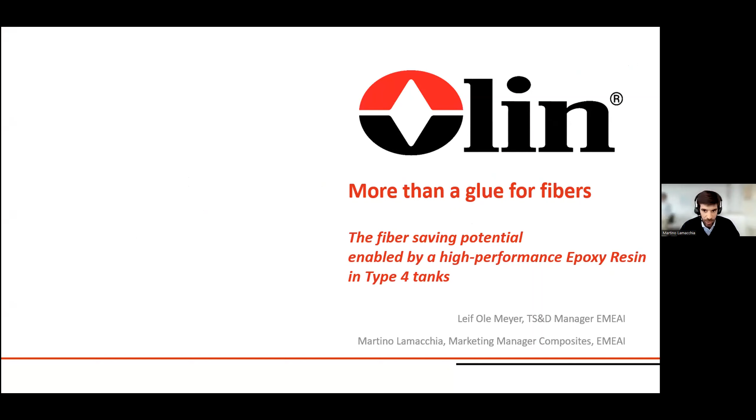Next slide, thanks. Before deep diving into the topic, allow me to spend really 5 minutes introducing Olin Epoxy, for those of you who didn't know it, or Olin actually.

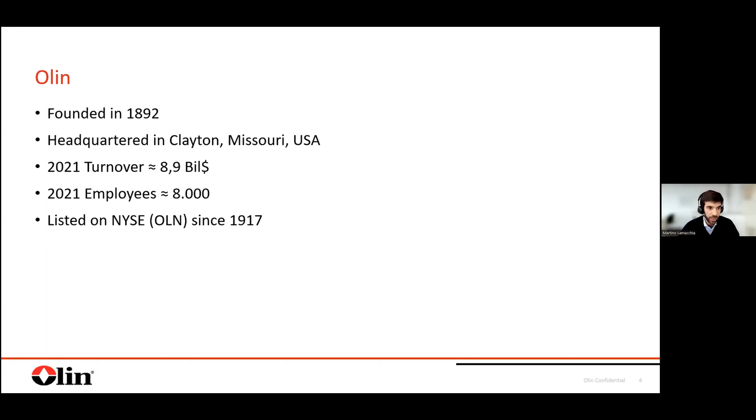Now, I will definitely not bore you with the full history of Olin, but I'd like to mention 3 facts about our history relevant to today's discussion. First of all, in 1892, 2 companies were born in the US: Olin Industries, an ammunition producer, and the Mathieson Chemical Company, the first company in the US to make chlorine out of salt electrolysis. So chlorine has really been in the soul of these companies for years.

Then in the '50s, these 2 companies merged together, originating a diversified group active on chemicals and ammunition. And we are still today that kind of company.

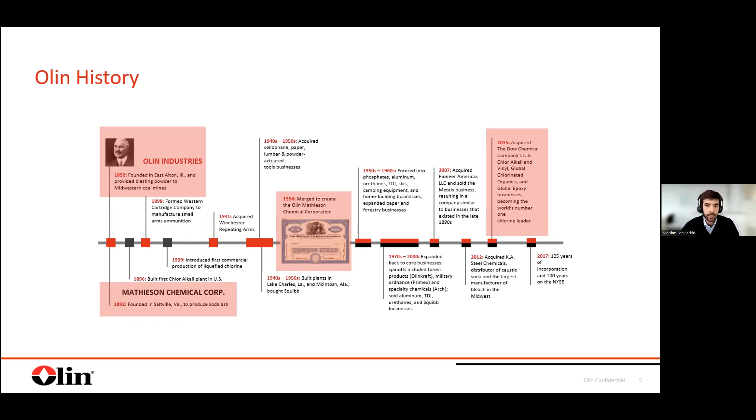The third fact I want to mention: in 2015, a transformative milestone for Olin, when it acquired from the Dow Chemical Company the US chloralkali business, the global chlorinated organics business, and importantly for our talk today, the global epoxy business. Thanks to this move, Olin became the #1 global producer of chloralkali products and the #1 global producer of epoxy materials, inheriting this position from Dow Chemical and bringing it to the next level.

So Olin today is organized into 3 businesses: Olin Chloralkali Products and Vinyls, world leader in chloralkali; Olin Epoxy, world leader in epoxy resins; and Winchester, our ammunition business, world leader in small to medium caliber ammunitions.

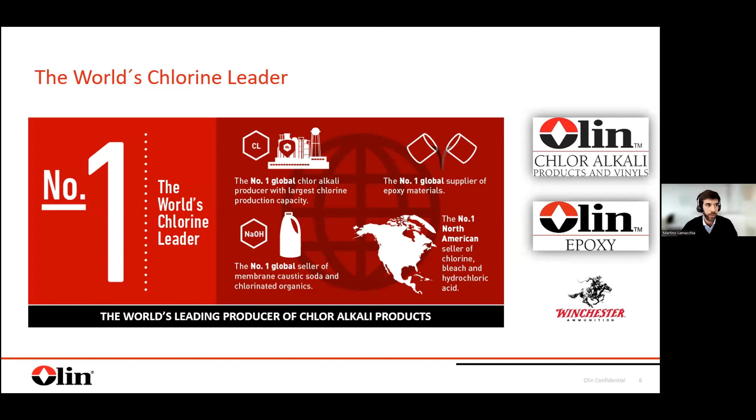Now, if you want to remember something about Olin Epoxy, the next few slides are key. First of all, what do we do? We leverage epoxy properties like lightweight strength, corrosion protection, electrical insulation, and chemical resistance to approach markets where these properties are valuable, like composites, coatings, electronics, and civil engineering. So that's what we do, in 30 seconds.

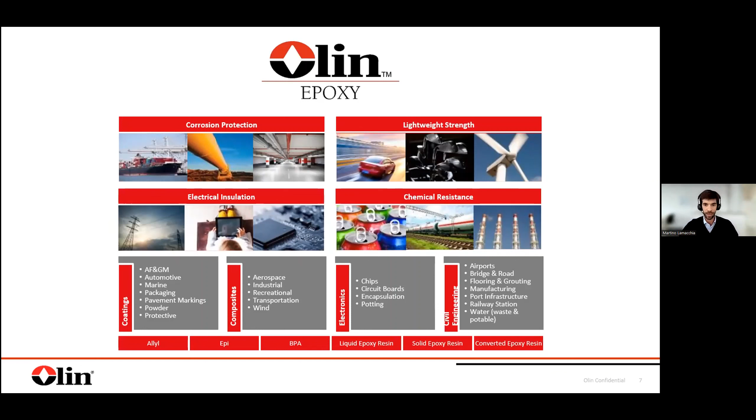Now let me focus your attention on this slide, which I think really explains the key differentiating aspect of Olin. I don't know how familiar you are with epoxy chemistry, but from a super high level, to make epoxy resin you need 2 things: epichlorohydrin and bisphenol A.

Now, most epoxy resin producers run a non-back-integrated model, sourcing epichlorohydrin and bisphenol A on the market. This model might have some advantages, maybe leaner assets, but on the other hand it presents question marks in terms of reliability of supply. How do you reliably find the epichlorohydrin needed to make liquid epoxy resin, for example? Epichlorohydrin is a structurally short material, causing big headaches to those who have to source it externally, and also raising question marks about how scalable a non-integrated epoxy supplier can be.

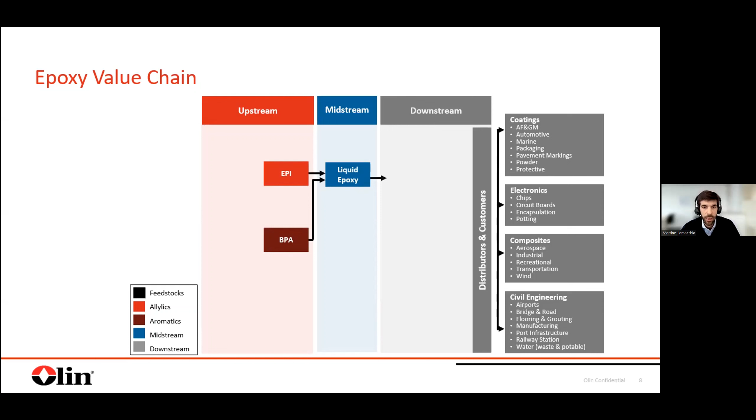Epoxy resins are linked to many applications that will require growing amounts of epoxy resin going forward, like wind power and composites. So a non-integrated model poses question marks in terms of how to find the epichlorohydrin needed to supply growing amounts of epoxy resins into the growing epoxy industry.

Now, as you can see from the slide, Olin's model is completely different. It's a deeply back-integrated business. And here you see why Olin, a chlorine leader, acquired from Dow a global epoxy business, a huge consumer of chlorine.

This very deeply back-integrated model sees Olin starting from digging our own brine mines to make our chlorine, then converting it to allyl chloride, to epichlorohydrin, and then to our resins, which are then converted into many other systems and products.

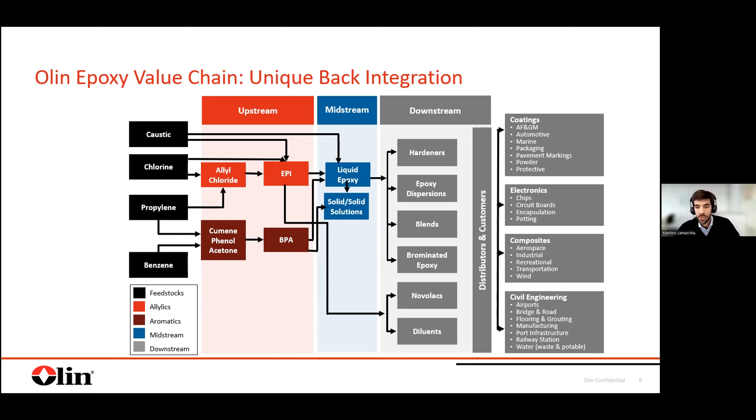In the next slides, you will see our composite systems that are an example of what we do and what we use our structure for at the end. In composites, we make systems for several technologies, from pultrusion to infusion to hand layup, HPRTM, prepreg, and obviously filament winding. That is the topic of today.

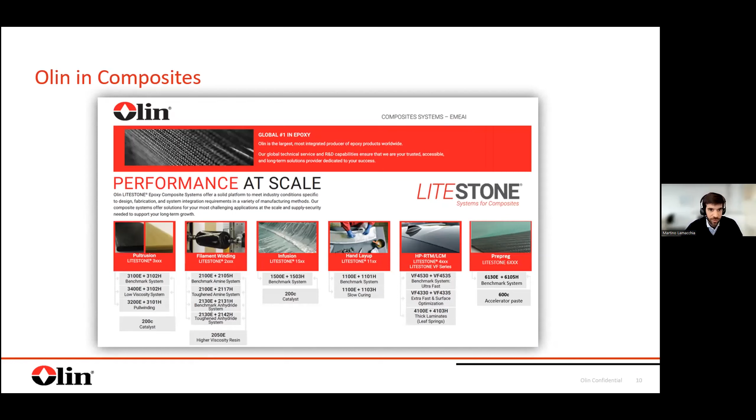When talking about our composite business, we like speaking about performance at scale. We like that because we think our deep back integration is putting us in the right position to supply in the long term the big growing volumes that some of these high growth composite applications will call for. A very good example of these growing applications are composite pressure vessels.

We get now near to our topic. Composite pressure vessels are linked to some of the mega trends shaping our industry. Think, for example, of climate change, decarbonization, the big need to reduce emissions from transportation. 12% of greenhouse gas emissions come from road transportation. So we are seeing a big shift towards alternative fuels. One of these alternative fuels is...

electricity. This generates a big market for battery electric vehicles, but also generates a big market for fuel cell electric vehicles, also known as hydrogen vehicles. Forecasts show that by 2030, we're going to see between 2 million and 2.5 million fuel cell electric vehicles on the road, mostly medium to heavy duty vehicles, so trucks and commercial vehicles.

These vehicles, being electric, will need to drive far to be attractive. And to drive far, they will need to carry on board a lot of hydrogen. To carry on board a lot of hydrogen, this hydrogen will need to be stored at very high pressures. And that's where composite tanks come into the picture.

This will also generate demand for, let's call it, hydrogen infrastructure - how to bring hydrogen to the refilling station and how to store it there. Again, composite pressure vessels are going to be part of the game.

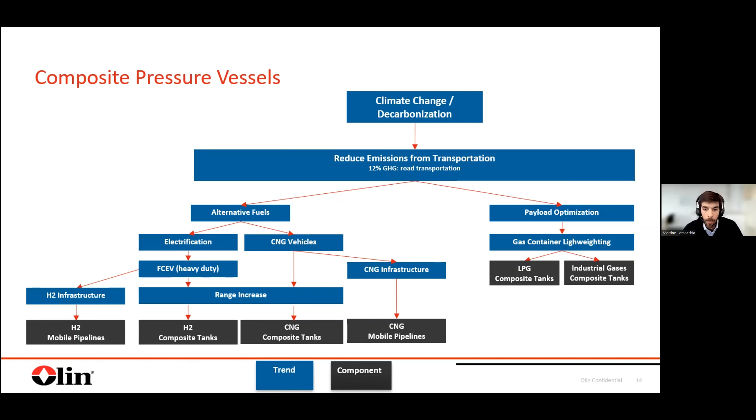Now let's come to the topic of our presentation in the next slide, which is: what is the role of the matrix in composite pressure vessels? This is actually a pretty wide, pretty general question. A good next question to narrow it a bit could be: what matters in pressure vessels? What are the requirements, and what role can the matrix play within these requirements?

In the next slide, we have tried to narrow down the discussion to one specific application that we think is a very good example of the epoxy's role in this whole thing. So we are mentioning hydrogen pressure vessels in this case, and we use as an example this table that comes from the norm EC 406, which regulates type approval of composite vessels for hydrogen vehicles.

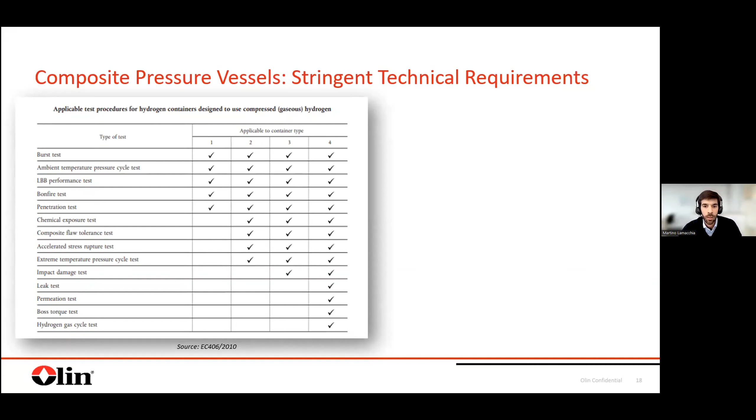The table here that we are showing lists the tests that a hydrogen vehicle needs to undergo in order to gain type approval. Now, in the next slide, you will see, in our view, that the matrix is key in at least 50% of these tests. So we want to mention two examples of that.

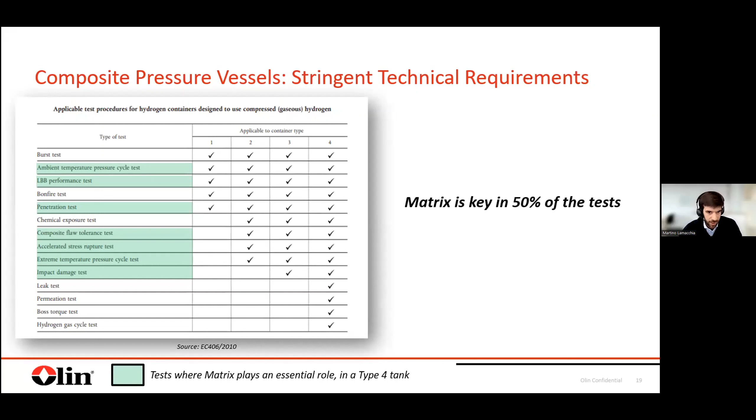So in the next slide, we have listed two examples we want to show. At the end, when you look at what are the CTQs, we don't have time to go deeply through all these tests. But if you read the requirements, you'll understand that resin CTQs that really make a difference are fatigue resistance and fracture toughness, which can play a vital role in pass-fail of these tests. We want to show you two examples of this.

The first example is the temperature cycle test. Here you see what happens to a clear cast of epoxy resin where a solid object has been put in to facilitate the generation of cracking. What happens to this clear cast when it's cycled between -20 and 80 degrees for 10 times? You see the difference between a toughened epoxy resin and a non-toughened epoxy resin. I think the pictures are self-explanatory.

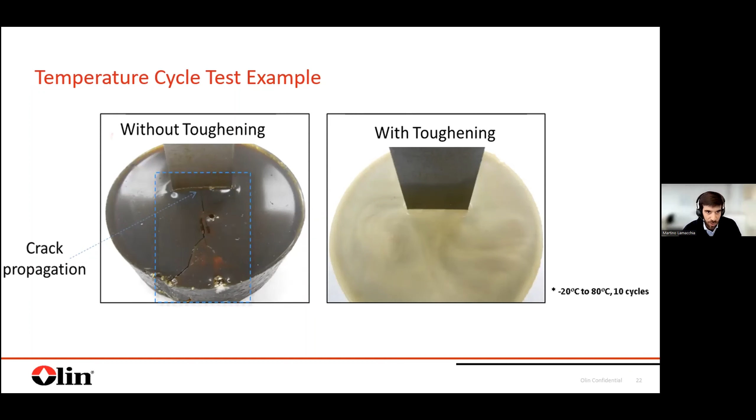So you see how the selection of the proper matrix can make a difference, for example, in a temperature cycle test. Let's go to the second example, which is the impact test. When generating a specified impact under specified conditions, needed to gain type approval, you clearly see a correlation between the impact energy and the burst pressure of the tank. A good question could be, why is that happening?

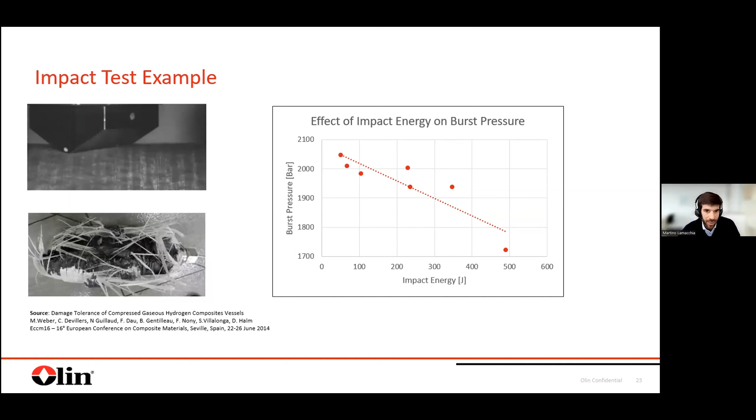If you look at the pictures in the next slide, you will see that a reason for this correlation is the delaminations and microcracking generated during an impact. Delamination and microcracking are deeply dependent on the matrix, the type of matrix you are choosing.

The key high-level concept we would like to transmit here is: not every matrix is the same, not every epoxy is the same. Different grades for different applications and requirements.

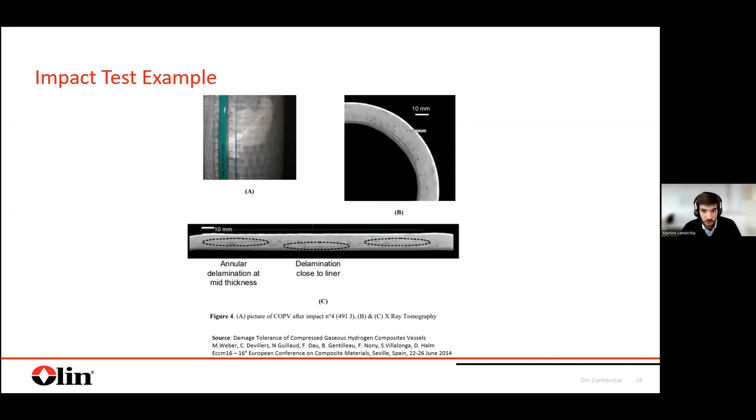Again, this emphasizes how the choice of the epoxy matrix can make a difference in some of the key tests needed to gain type approval of a tank.

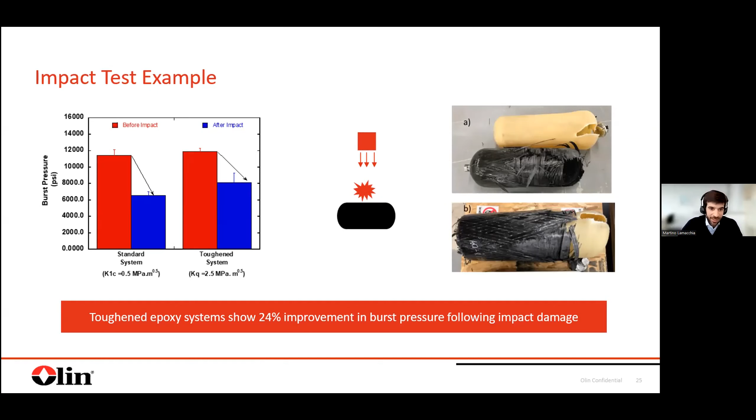So in the next slide, we are showing a sort of challenge to you. The challenge is: if thanks to an enhanced resin you can gain some extra performance, as you saw in the previous slide, why not think about optimizing the fiber content of that tank, bringing the performance back to the previous level while having saved some costly carbon fibers? This is a bit the challenge we want to pose with this presentation.

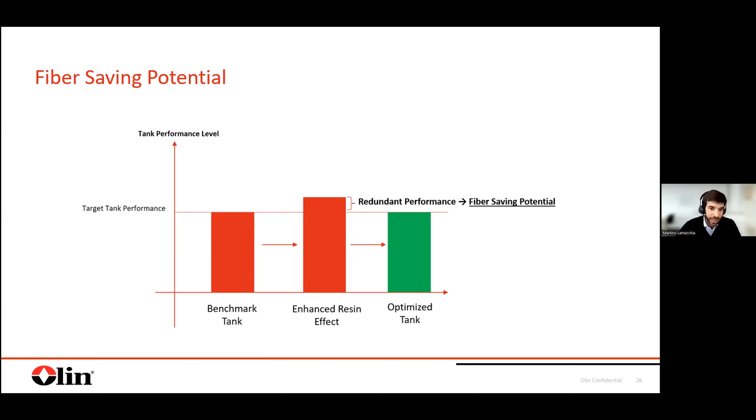In the next slide, I'm trying to wrap up this first section, just saying: when designing a tank, when trying to optimize the fiber content of a tank, don't think of the epoxy resin, the matrix, as just a glue for the fibers. And here we come to our title: it's something more. The epoxy matrix, and the right choice of it, can play a vital role in passing or failing at least 50% of the tests needed in hydrogen homologation testing.

So we are here to support, and are very happy to support, anyone who needs help selecting the right system for the right application. However, this is not the end of the story, because epoxy is not only key to the mechanical performance of the composite in our tank, it's also one of the most defining elements of the processing of this tank in a wet winding process. In the second part of the presentation, we want to drive you through this other important aspect and the role of the matrix in processing.

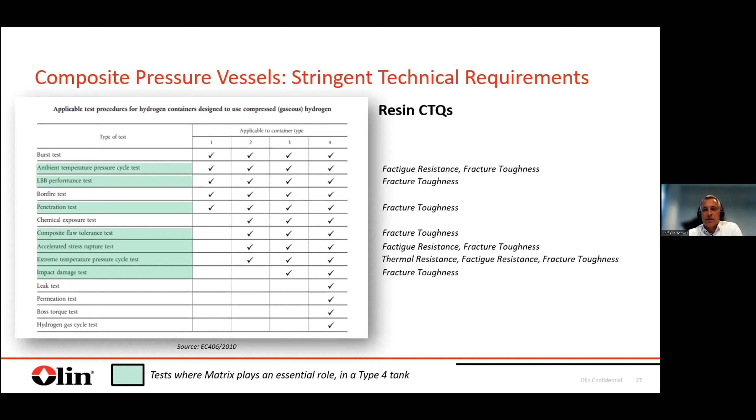In the end, for us as a resin supplier, the certification requirements of a tank do not represent the full critical-to-quality parameters that we typically get from our customers, because first of all, a tank needs to be manufactured, and the manufacturing process is also driving a lot of these challenging requirements. So toughening is important, but it's not everything, because some typical toughening agents used for thermosets have impacts on other parameters as well.

Usually you are targeting to increase the fracture toughness of a system to achieve higher damage tolerance. But what could happen is, for example, a viscosity increase from fillers or rubbers. There could be changes in reactivity if you're using inorganic fillers with particular surface chemistries. It can change tensile properties if soft particles or soft phases are used, impacting overall composite properties. And last but not least, plasticizers, which can also achieve toughening, would impact the glass transition temperature, and finally the service temperature of the tank. So in the end, we need to consider all these different parameters.

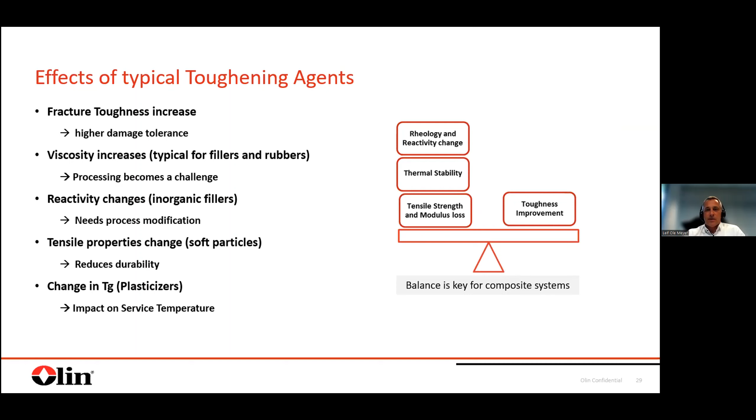As shown on the right side, we need to find the right balance between performance-driven requirements and manufacturing-driven requirements. To dive into this topic, we've prepared a second case study: the resin requirements for the classical wet winding process. Here we'll focus a lot on the manufacturing process. We've decided to focus on the most established but also simplest process, the very classical wet winding process.

If we look at this process, we start with a creel holding the dry fibers on either bobbins or rolls. There's some fiber guiding, and then the first point where resin comes into play is the fiber impregnation, which can take place in a resin bath - in the simplest form, just an open bath, a reservoir filled with liquid resin. Then we handle the impregnated rovings and wind them, typically around a liner material made of metal or polymer. Today we see polymers dominating the picture, particularly for gas storage.

Once the winding step is completed, the tanks, still with liquid matrix, are transferred into a two-step oven process. In the first step, the target is usually gelation or initial cure, and in the second step, the so-called post-curing, where the full degree of cure, final Tg, and final mechanical properties are achieved. Overall, we see 4 to 5 or even 6 process steps, depending on how deep you dive into the different processes, and it looks too complex to directly guess the processing or resin requirements based on this.

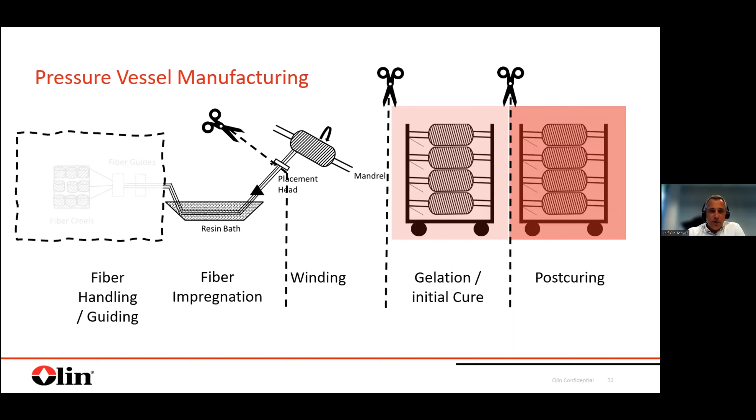So let's start running through the process, beginning with fiber impregnation. The purpose, or key process requirement, of fiber impregnation is typically to provide very good wetting of the fibers, to cover all fiber surfaces with epoxy resin, and to have no air entrapments or other bubbles, which would be a deviation from the desired condition.

And last but not least, we expect this also to run over a relatively long time in a stable process without a lot of need for corrections. Based on this, the key material requirements for the fiber impregnation step: first and most important is the viscosity to achieve excellent wetting and a good high line speed for productivity. Basically, the viscosity needs to be low or even very low. It's really for the wetting. In particular for carbon fibers, the viscosity should be as low as possible.

Looking at the pot life, in particular for the classical open bath, it should be as long as possible. Or let's put it a little differently, as long as needed. If you have a process able to run with a very small bath volume, you may accept some compromises on pot life, but in general, what we still mostly see is relatively big resin bath volumes. So you need this entire volume of material not to react, to keep the pot life and workability over a very long time. So reactivity should be low or even latent. And of course, you also don't want any reactions causing exotherms at this step.

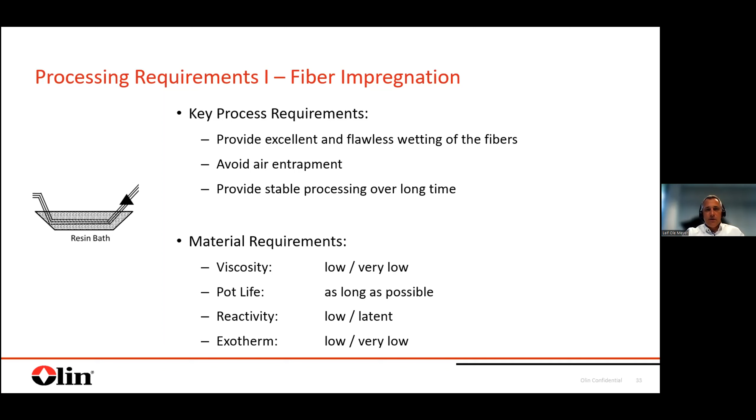So we're going to use more or less the same scheme for evaluation for all the different process steps. Let's look at the second step, the winding process itself. Basically, what you want to see here is good fiber placement and sufficient tack of the material.

You also don't want to see resin dripping, for two reasons. First, you're paying for the material. Secondly, this would impose a lot of cleaning requirements on your manufacturing environment. So this needs to be avoided or minimized as much as possible. You still do not want to see high exotherm behavior in this step, in order to protect the liner material, which typically is a polymer material with a certain temperature stability. You cannot afford to exceed the temperature stability of your material. And last but not least, you also want to avoid air entrapments.

So regarding the material requirements, the viscosity could be higher compared to the bath step, the impregnation step. I would call it medium to high. For the pot life, in this step, you do not have specific requirements anymore. The winding itself is relatively fast, so you don't need a long pot life here. Regarding reactivity, it's more or less the same. And regarding exotherm, you still don't want to exceed the stability of your liner material.

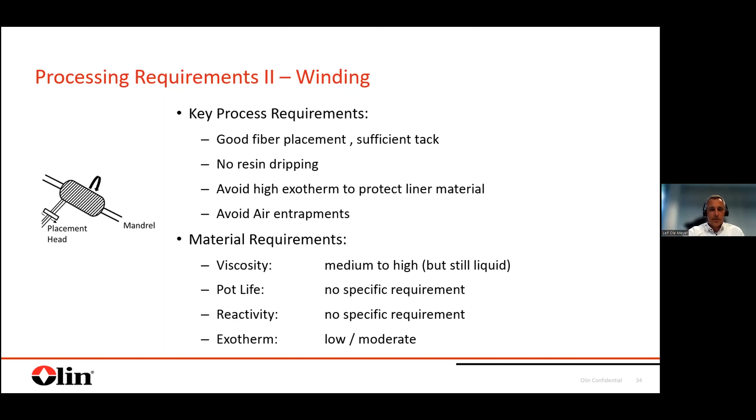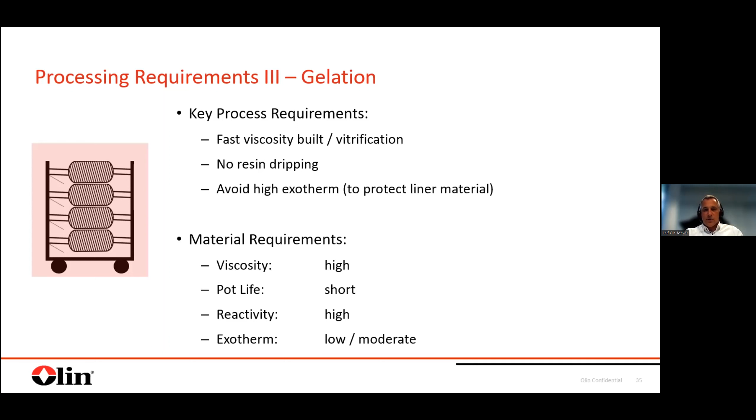You still don't want to see any resin dripping, and you want this viscosity build, or vitrification, to be as fast as possible. You can see from this fast viscosity build and avoidance of exotherm, there could be a bit of conflict. So viscosity in this step should be high, pot life can be short, reactivity can be high, but still at a low to moderate exotherm. So again, this looks a little challenging to combine all these different requirements.

The final process step is the so-called post-curing: building the final degree of cure, achieving the final TG, and also the final mechanical properties. Ideally, you want this step to be as short as possible, since this determines your cycle time in manufacturing a lot, but still you need to make sure you protect your liner material. So overall, the requirements in this step are a bit limited.

You don't care about viscosity anymore. You don't care about pot life anymore. You're just interested in a high reactivity at a manageable exotherm level.

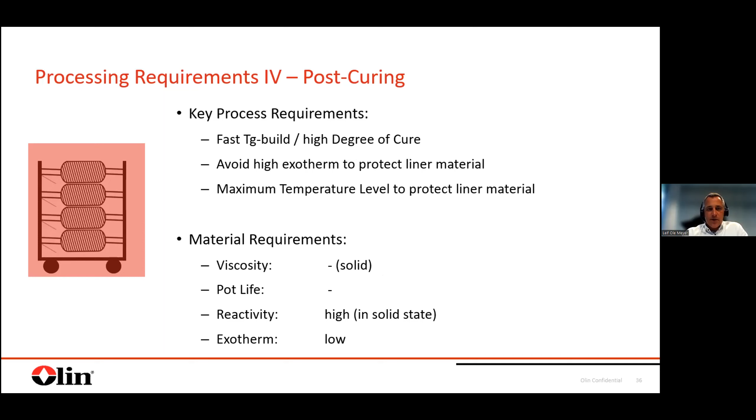All right, so these are basically the singular steps. Let's try to move into the direction to recombine this into the entire process. And in the first step, let's look at the viscosity profile.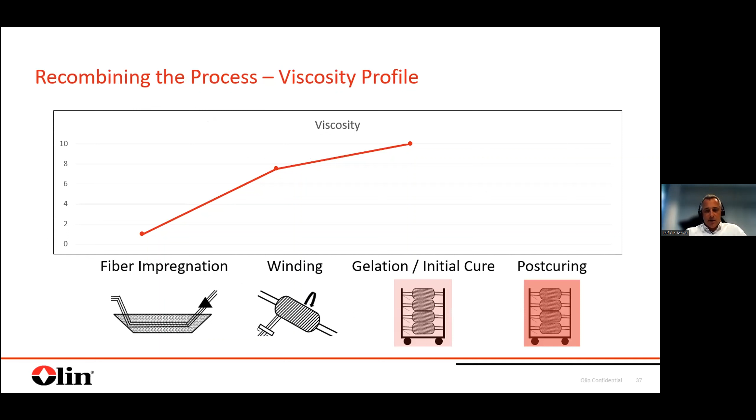Basically, what we learned in fiber impregnation, you're targeting viscosity as low as possible. However, you could expect a steep increase towards the winding process, and then upon gelation and cure, you expect it to be on the pretty high side. So overall, this viscosity increase over the process makes sense. Chemically, you're increasing the network density, the degree of cure over the process steps. So in general, it makes sense.

However, there are still some conflicts. For example, in the resin bath, you want low reactivity, low exotherm, long pot life, low viscosity, and at the same time, just a couple of seconds away in the process, you expect a very steep viscosity increase, all at low exotherm. So there's a bit of conflicting parameters in this step, and in the end, these conflicts need to be managed by choosing a proper temperature profile during the individual process steps. I'll come back to the temperature profile on one of the next slides.

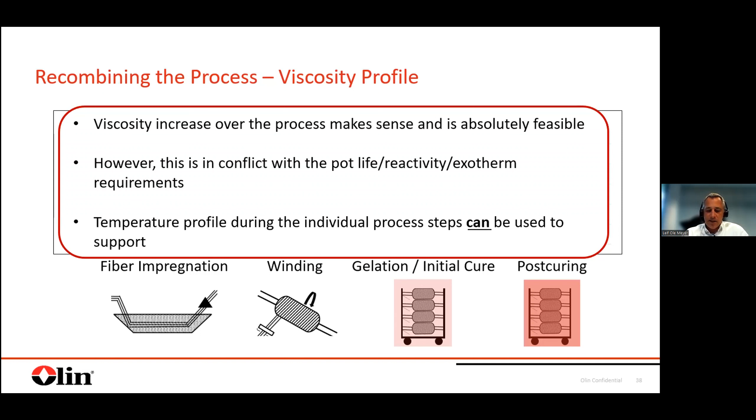If we look at the other parameters, at pot life, reactivity, and exotherm, I combined all of these in one graph because actually they are kind of dependent on each other. Pot life requires low reactivity in the liquid phase. Exotherm requires low reactivity in the entire process. So it looks overall a bit more complicated.

And I would say overall, the key determining parameter for type 4 pressure vessels is definitely to manage the exotherm over the entire process. The critical point is really to keep thermal damage away from the liner material.

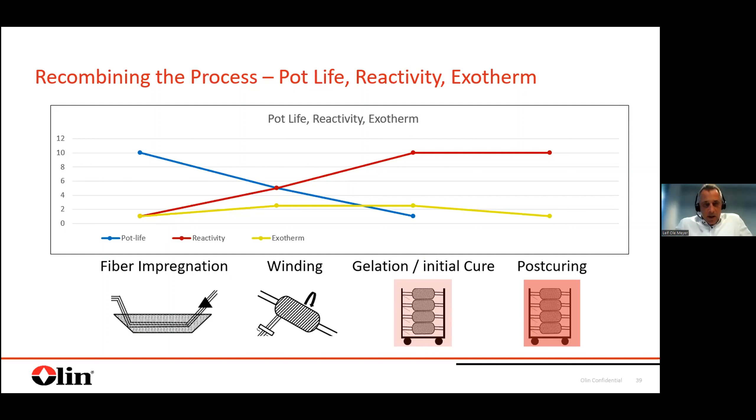Overall, it still makes kind of sense: reactivity low in the beginning and increasing over time. So this is something that can be managed. The process requires low reactivity during wetting, high reactivity in the final cure, and in the end, very high reactivity in the post cure, which is not easy to achieve chemically.

There are methods to use, for example, some catalysts, but this again needs to be balanced with the other parameters. And this is a little bit key of my statement here: there are always potential conflicts and limitations between reactivity, viscosity, and exotherm. And in the end, this needs to be adapted via the temperature profile.

At the same time, seeing this conflicting and complex profile of requirements, we can already assume at this point that there may not be the one-fits-all solution for a good epoxy filament winding system, and that depending on the process and other parameters, a certain portfolio and adjustment is needed.

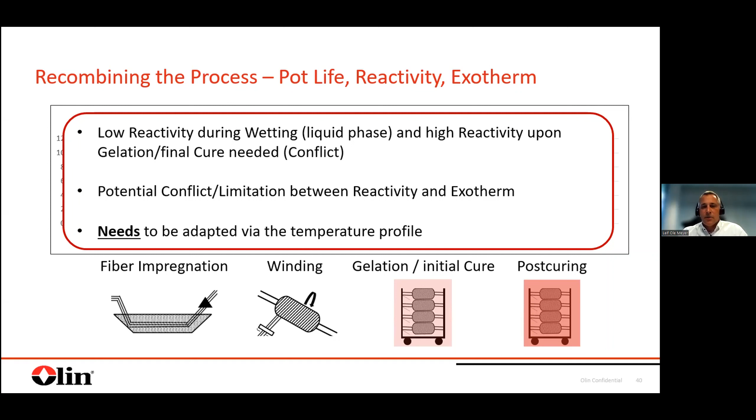So looking at the temperature profile, typically in the resin bath, the typical working temperatures range from room temperature up to 50 degrees C. The upper limit is limited a little by the pot life of the material, the resin hardener chemistry. The purpose of increasing a little over room temperature here is to achieve a further reduction of viscosity, to even further improve the wetting process.

For the winding itself, typically we see this being done at room temperature. It would also be possible to have slightly elevated temperature, but the critical point is to avoid the exotherm. So this is why typically this is a little bit in the conservative temperature field.

Then the gelation is typically done—for some of our resins it could be done at room temperature, but typically what we see is roughly between 40 and 90 degrees C. The limitation here is the exotherm in relation to the liner material. And for the post-cure, we see ranges from 75 up to 150 degrees C for high TG systems, again with the upward limitation being the liner material at this point.

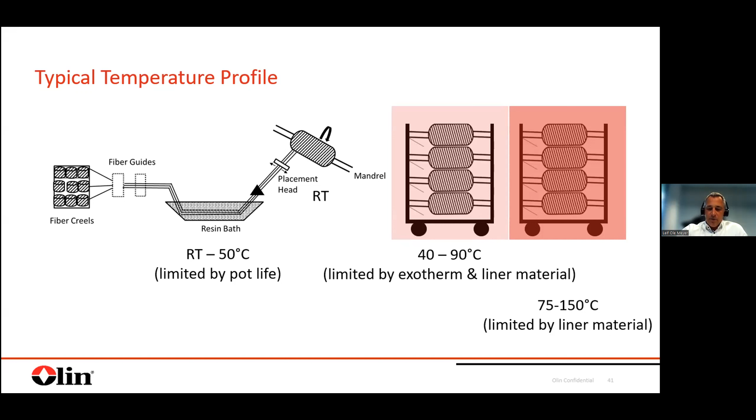All right, if we combine this back into a high-level material specification, my clear statement is good fiber wetting is a key requirement, and this requires very low viscosity during the impregnation stage, whatever resin you use. This is key, because if you have flaws in impregnation, if you have air entrapments at this point, you will carry them through the process, impacting the quality of your pressure vessel. This can be supported by carefully increasing the temperature of the resin bath, and this is where we can help you with reactivity data of our resins to find the right adjustments.

For the wet winding process, low reactivity or long pot life in the resin bath is another important requirement in order to avoid early gelation, which would cause the need for regular clean out of the entire resin bath, limiting productivity and causing waste at the same time. So long pot life is the second important thing.

The higher viscosity during winding can be a beneficial aspect. It can be managed by running the temperature profile, or by choosing the proper resin hardener combination. In the final steps, gelation and post-cure, it's everything about reactivity - how fast you build up the cross-link density, the molecular network, and at which temperature is required to get there. This is where we have a range of different resins and hardeners to choose from, and where we can support finding the right balance.

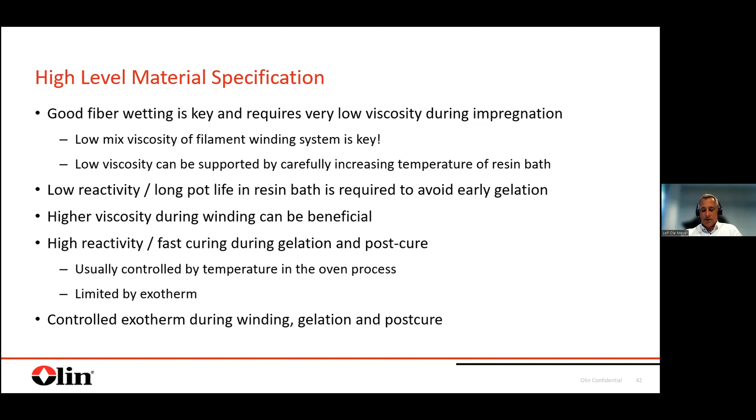Overall, it's coming back a little bit to the picture I showed at the beginning with the balance. We have some conflicting parameters: reactivity, viscosity, and exotherm. Regarding viscosity, you want it low, but you want a fast increase without exotherm - this is chemically and physically a conflict in itself. Regarding exotherm, you want a low exotherm, but at the same time a fast cure speed, which is again a chemical and physical limitation. And regarding reactivity, you want low reactivity in the beginning in the bath, in the liquid phase, but as much reactivity as possible in the solid state to keep your post-curing cycle as short as possible. So this again represents a limitation.

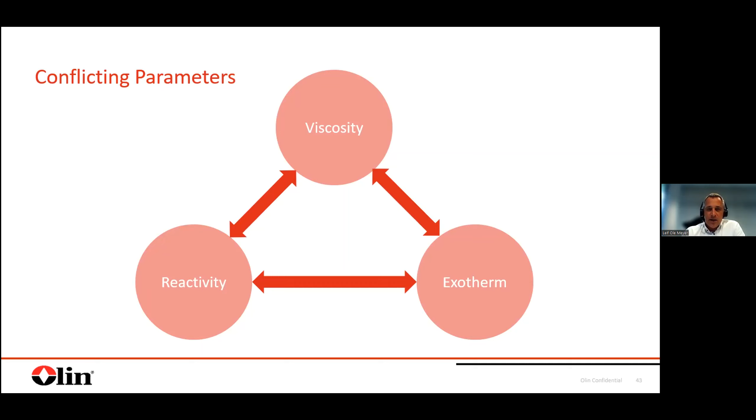So the learnings from the process study - one clear and obvious conclusion for filament winding of pressure vessels is that there is not a one-fits-all solution from a processing or manufacturing perspective. For all the different manufacturing details and details of the vessels, it's always about balancing the conflicting parameters between productivity and quality of the filament winding process. So the final specification of the material and the choice of material will always depend on details of the manufacturing process.

Can you handle a small bath volume so that you're able to process higher reactive systems? Or do you need really full latent systems so that you can run a very big bath? It's about the size and wall thickness of the vessels to be produced - a very thick wall thickness is always more prone to effects of higher exotherm.

The fiber type is basically critical - it's the wetting behavior. The liner material is critical because it limits your maximum allowable temperature during the process. Then, of course, the final tank requirements, desired line speed, productivity, and so on. Overall, we have a lot of parameters that we need to balance and where we need to find the right way.

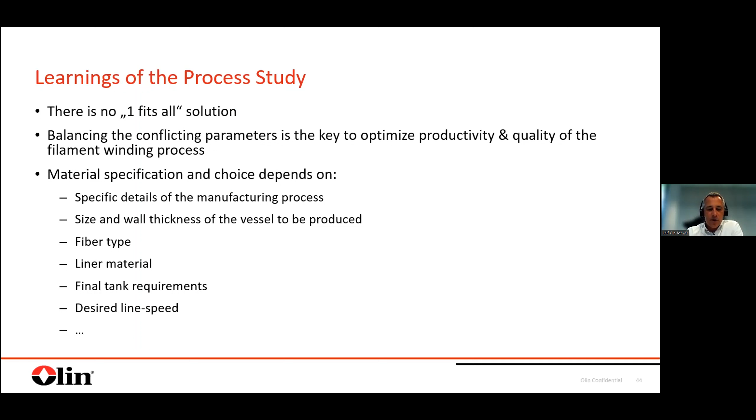In the liquid state, this is fully mixed into the epoxy - there's no separation or anything. And you don't have a negative impact on the viscosity of the system. So our toughening-modified resins or toughening-modified hardeners show exactly the same viscosities as the non-toughened ones. What happens upon cure of the epoxy system is that these epoxyphilic and epoxyphobic sites start to order themselves, and upon curing you have a so-called self-assembly structure.

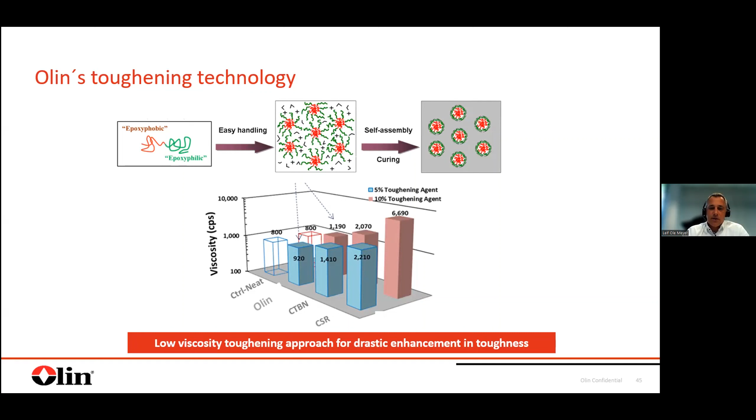So those liquid block copolymers are forming particles inside the matrix, and these particles are responsible for the toughening effect. So it's really a low viscosity toughening approach, creating the benefit of toughening without negatively impacting the manufacturing requirements. In the end, this technology enables us to create a very good balance between ease of processing and performance.

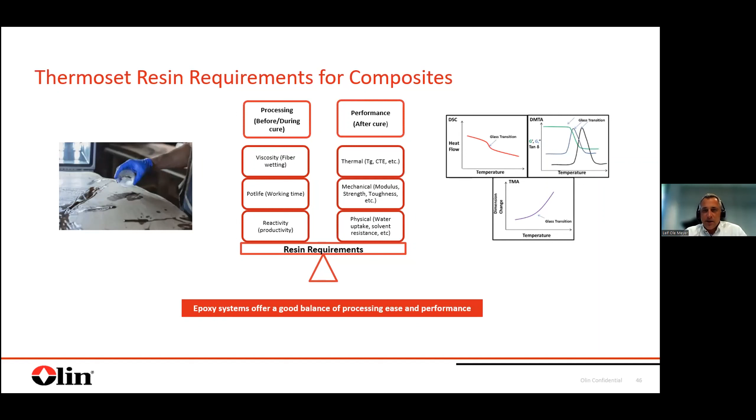This technology is available in a range of filament winding systems that I'm going to show you in a minute, and this comes back to what I mentioned: from a processing perspective, there is not one fits all. So we have a full portfolio of filament winding resins and hardeners. Most important, we have a range of different viscosities available.

We match parameters like fiber wetting, fiber slipping, and also TG. We have different grades here, and two different hardener chemistries available in our portfolio. On one hand, the amine hardeners, which have benefits with regards to curing at lower temperatures, and the anhydride hardeners, which have benefits in being very low reactive at room temperature, even latent. Last but not least, we have the toughening technology available for both of these cure chemistries.

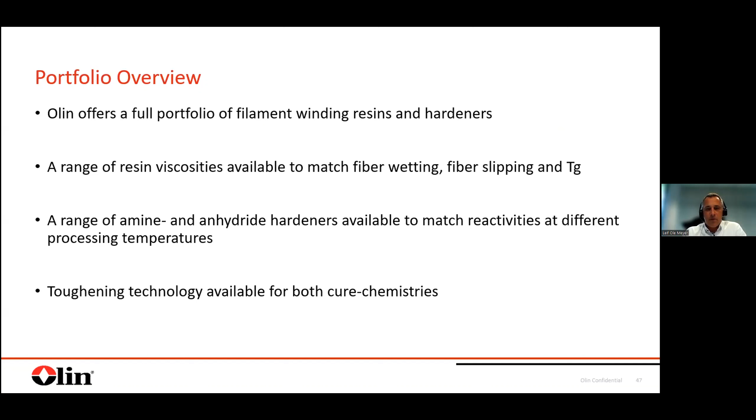Looking into our anhydride curing systems, we have a base system, which is our Litestone 2131H hardener and the resin Litestone 2130E. We have the Litestone 2142H, which is the hardener implementing the toughening technology as described before. And then in two different steps, we have the ability to increase the viscosity if this is needed for the processing.

Overall, a key benefit of our system is that typically we are supplying 2K systems. We have an additional catalyst, the Litestone 200C, in our portfolio, which can be used to adjust the reactivity, but this is not necessarily needed. So all our systems can be run and operated as two-component systems without the need for an additional catalyst mixer.

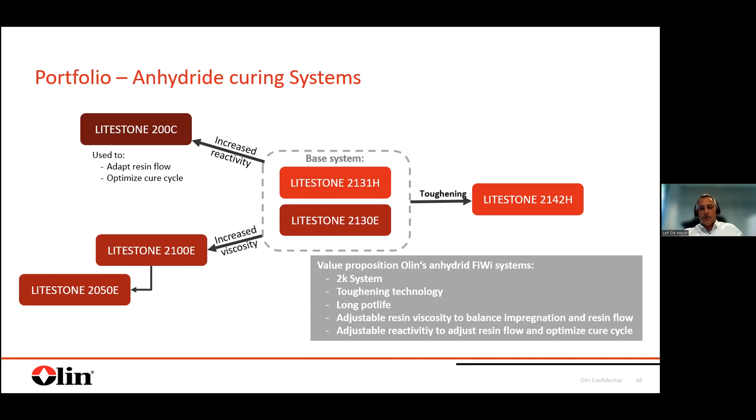For the amine, our portfolio looks similar. Again, we have a base system, which is a good starting point if somebody starts working on filament winding. Then we have a hardener which implements the toughening technology. We have two different hardeners which adjust the reactivity, so the ability to adjust the formulation towards longer pot life. These two hardeners can be processed from an open bath, almost similar to anhydrides, though not exactly with the same latency. And again, we have two different resins to move either to higher or lower viscosity.

So the overall value proposition: here we are talking about 2K systems. We have toughening available. In general, the amine systems have very good mechanical performance. We can adjust the viscosities and the reactivity, so basically everything that is needed to match all these challenging processing requirements that we have discussed before.

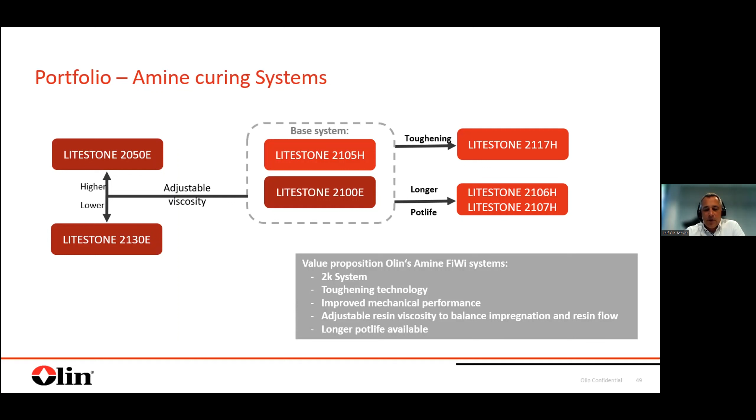All right, with this I'm coming almost to the end of the presentation with some conclusions.

The key learning from the first part is that certification of hydrogen pressure vessels and other pressure vessels follows very stringent certification requirements. Those requirements can be influenced and driven a lot by choosing the right resin, and can be addressed by our formulated epoxy filament winding systems from Olin. Toughening is a key parameter for a lot of these requirements.

The second set of requirements is determined by the manufacturing process, and this is really where low viscosity is key to achieving good quality and stable, reliable wetting of the fibers. But on the other hand, we have seen that the full resin specification depends on a lot of details of the design and processing requirements, where you always need to find balance between different requirements. So we are offering a range of filament winding systems, including toughening, different cure chemistries and cure kinetics, and flexibility on viscosity. We are here to help you choose the right system for your process and your tank project from this portfolio.